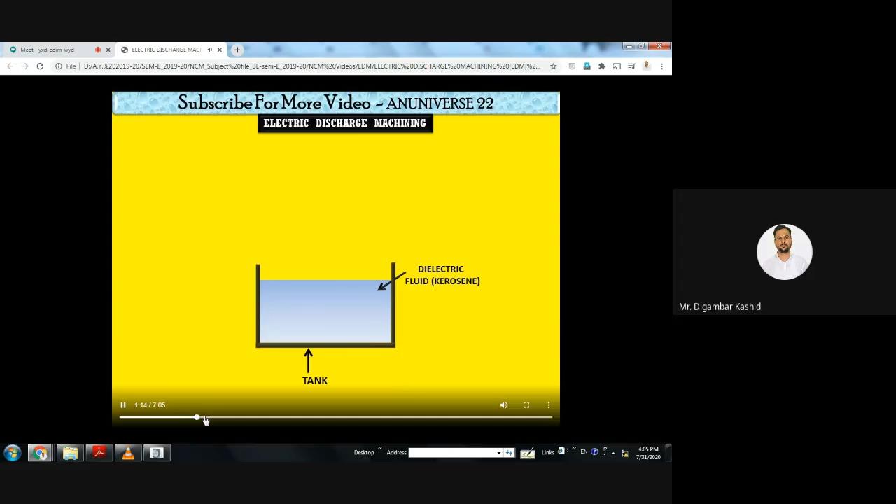Then, as we know, we have to immerse or submerge our workpiece in that dielectric fluid. So you can see there our workpiece is there, which will act as the anode, that is the positive terminal of the DC supply. It is connected to the workpiece.

Then, to pass or circulate that dielectric fluid, we should have the pump, then the filter system, and to flush that dielectric fluid we should have the nozzle. Then the main component is our tool.

And that tool is an electrode because it is connected to the negative terminal of the power supply, so it will act as the cathode. The material of the electrode here used is graphite or copper.

Then we have to give the feed. So for that purpose they have shown one arrow about the feeding.

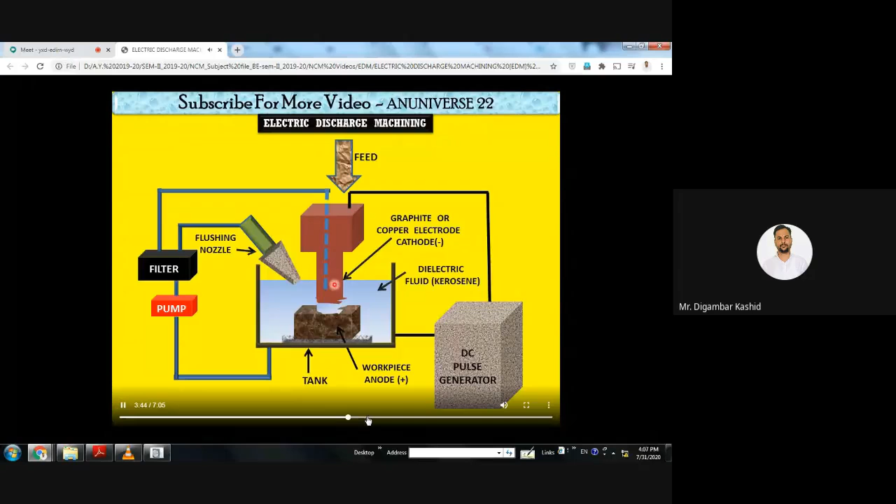Now we can see how we can flush the dielectric fluid between the inter-electrode gap. They are showing it like that. And there are different modes or methods of flushing the dielectric fluid that we have also studied - central, then side flushing also. So these are all the elements, and this is the total setup of our electric discharge machining process, which we already know.

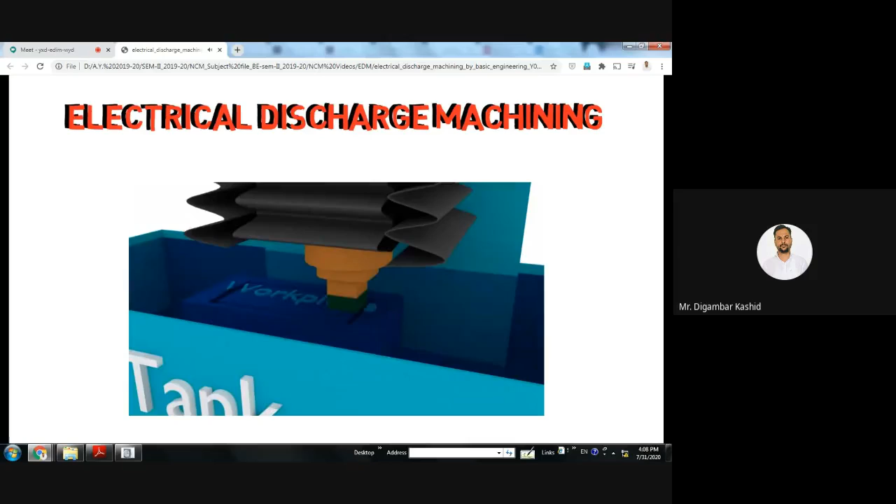Now we have another video about this electric or electro discharge machining. You can see whether the video is visible to you. Yes sir, hello, okay.

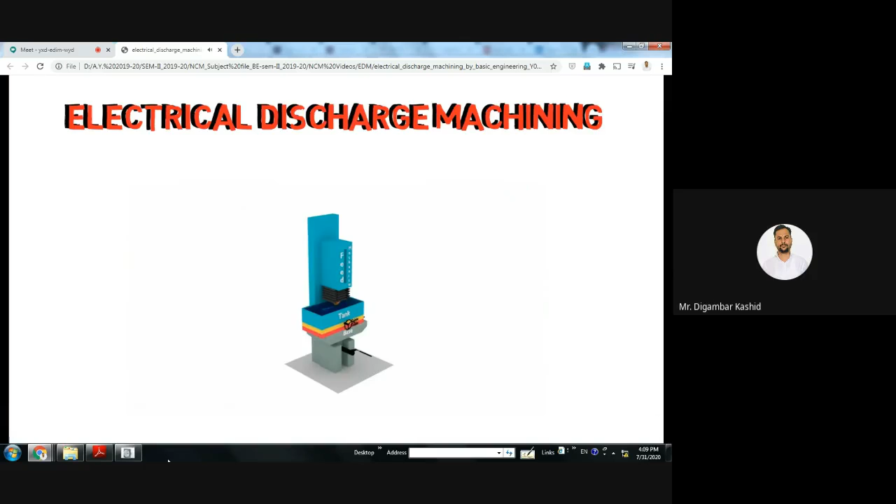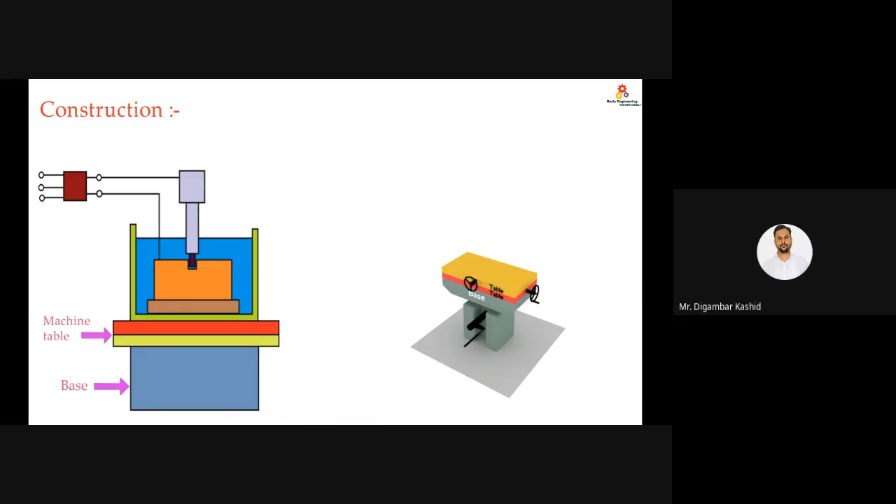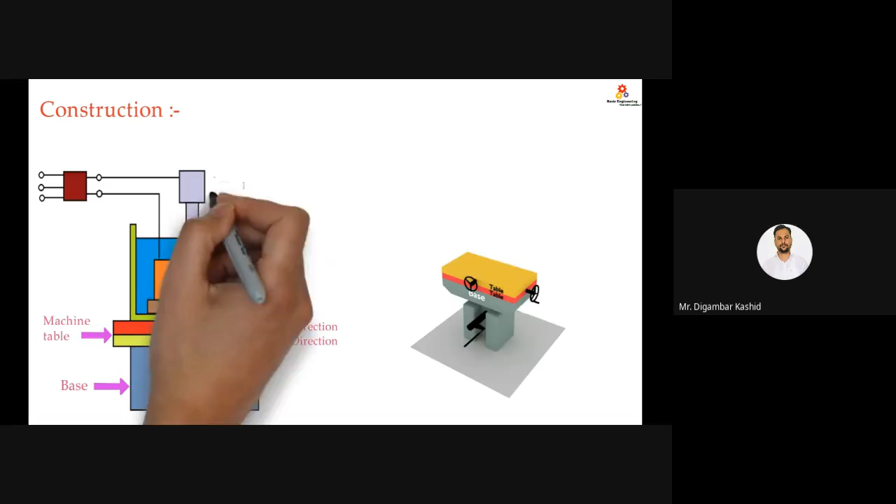You can see how our machine table, the work table, can move in the X and Y directions, and how we can give the feed to the servo mechanism system - that feed we have to give to our tool.

One side I'm showing the schematic diagram of this EDM setup, and on the other side we can see the animated setup with 3D components or elements.

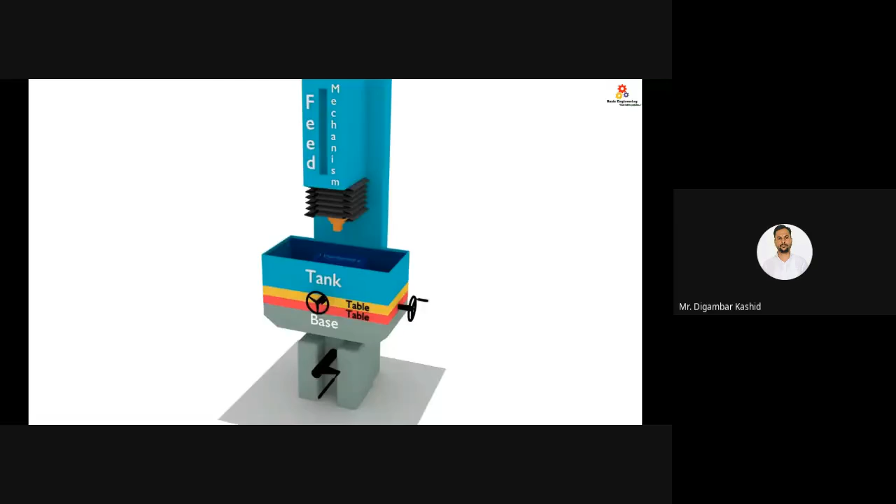So this type of setup, with minimum components, we can go for at our department also. Okay, you can just note down which are the minimum requirements of the machine, and from those parts you can develop our own EDM machine. And again you can go beyond that.

The idea is that the EDM machine should have the capacity of accuracy up to the micron, so you can say a micro EDM machine you can manufacture or develop. Because at our department or institute, till date nobody has developed such a machine. If you see at COEP Pune, then WCE Sangli, they have this type of setup. But for our college we can go for this, we should have that.

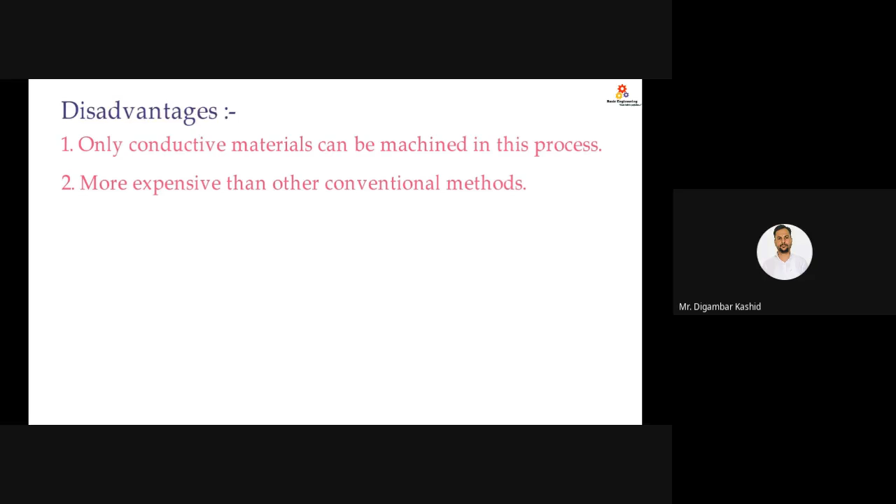Now we'll go for another one.

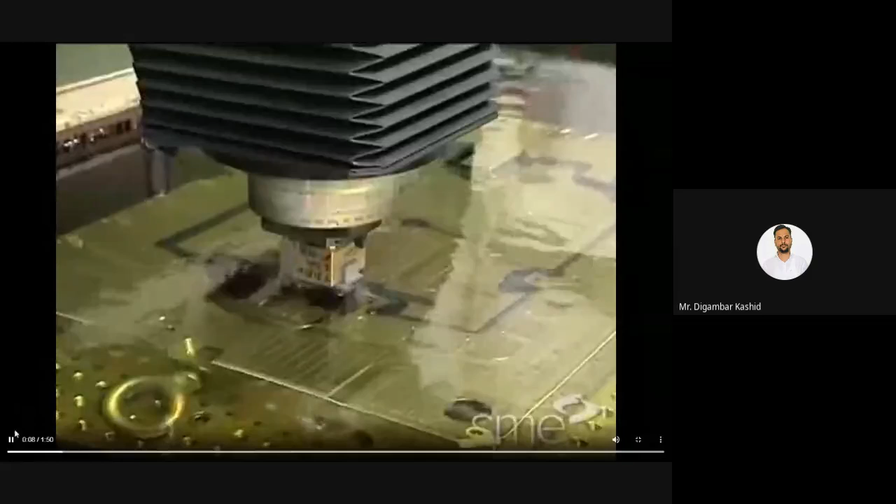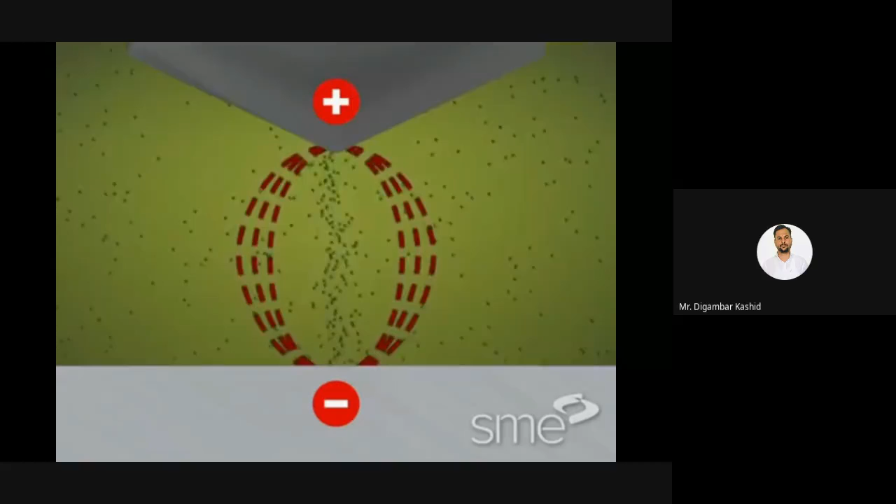This is an industrial application. Now you can see the workpiece, it is already submerged in the dielectric fluid, and this is the tool, having shape as a replica of the desired shape we want on our workpiece. You can see how the spark is generated, how electron and ion particles or molecules transfer between that inter-electrode gap. It's an enlarged view they have shown here. Plus means what? That is the anode. And minus means what? Our cathode.

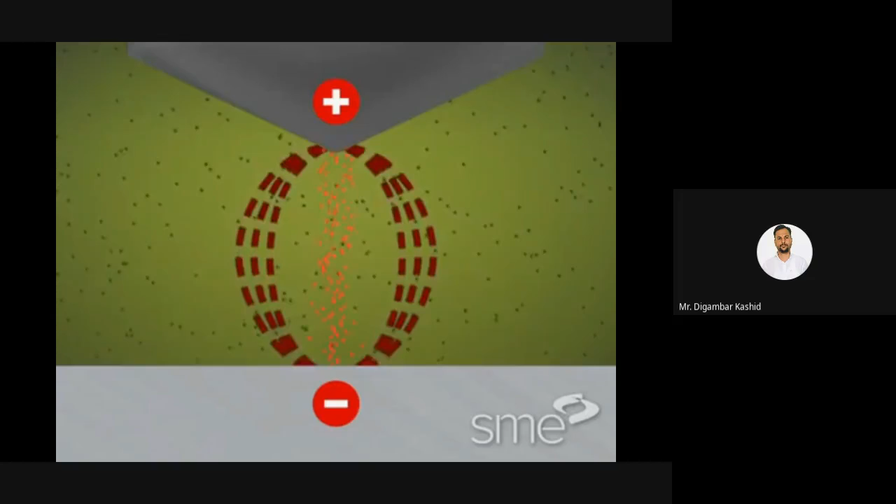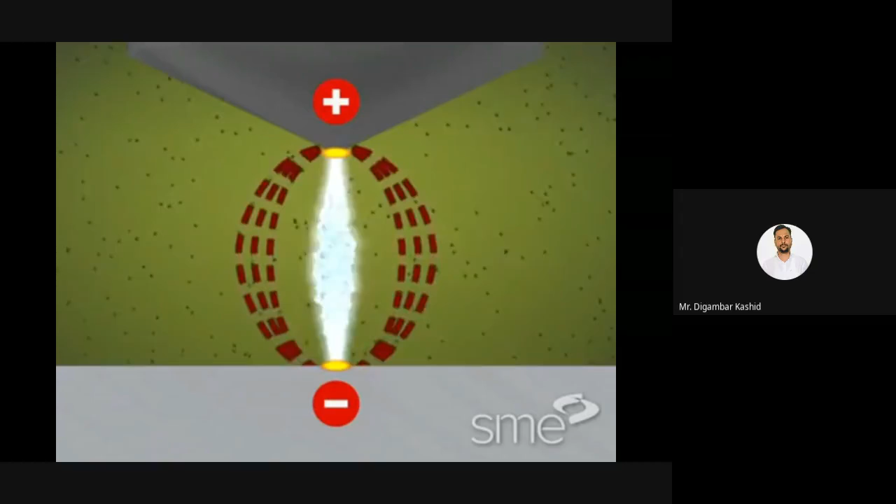If you change that polarity - we know normal polarity is positive terminal to the workpiece and negative terminal to the tool. Now you can see here also how the spark generates in between the interelectrode gap, between tool and workpiece, and that column is called the ionized column. And after melting, evaporation happens.

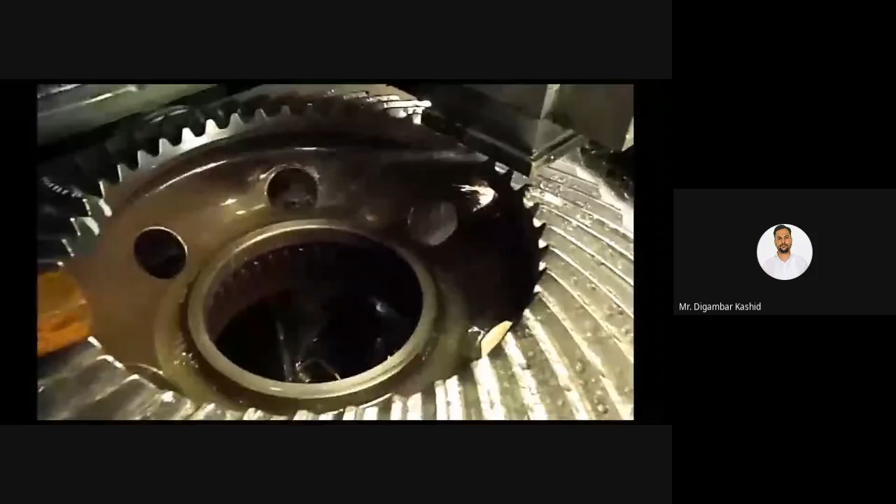Now you can see how the manufacturing of a gear is carried out using electro discharge machining. This is the EDM process; using this EDM process they are manufacturing a gear. That flushing, that liquid you are seeing, that is the dielectric fluid. Now you can see sparks generating there, and that is the gap we are observing - that is the interelectrode gap, and in that gap the spark is generating.

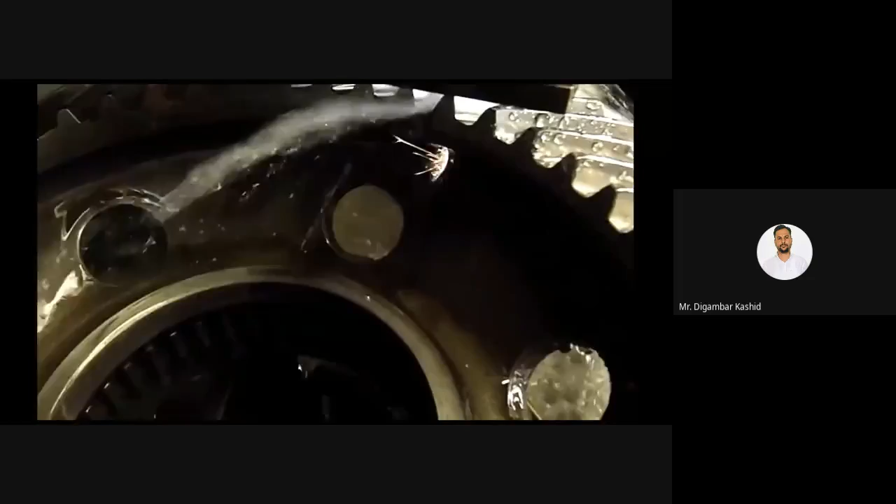Whether video is visible, Saurabh Dotre? Yes sir, yes sir. Okay, Amol Mari, whether are you watching this video? Amol - yes sir. Mari - yes sir. Okay.

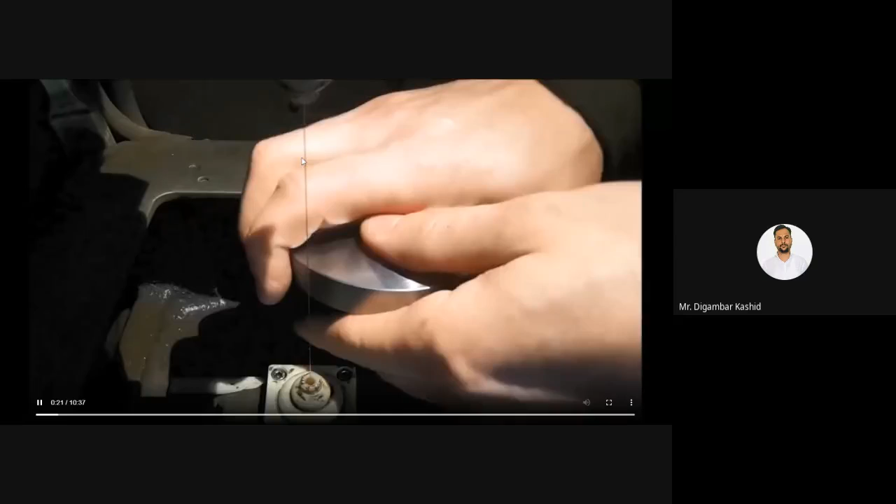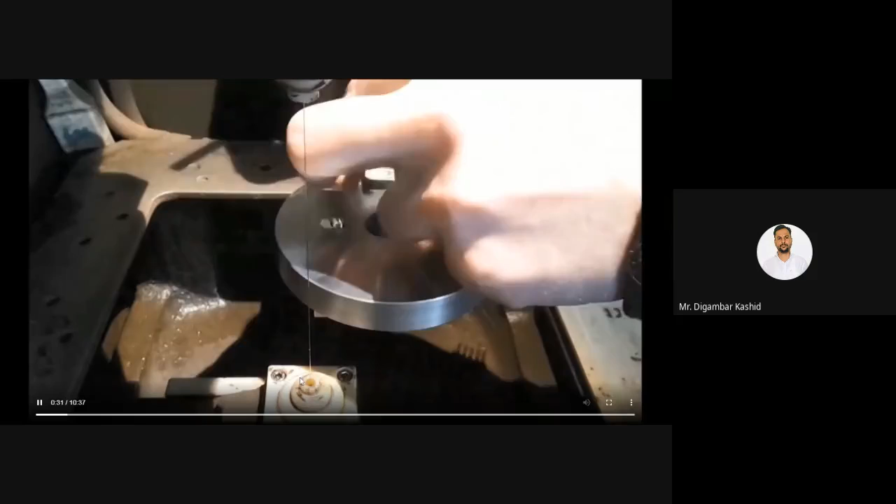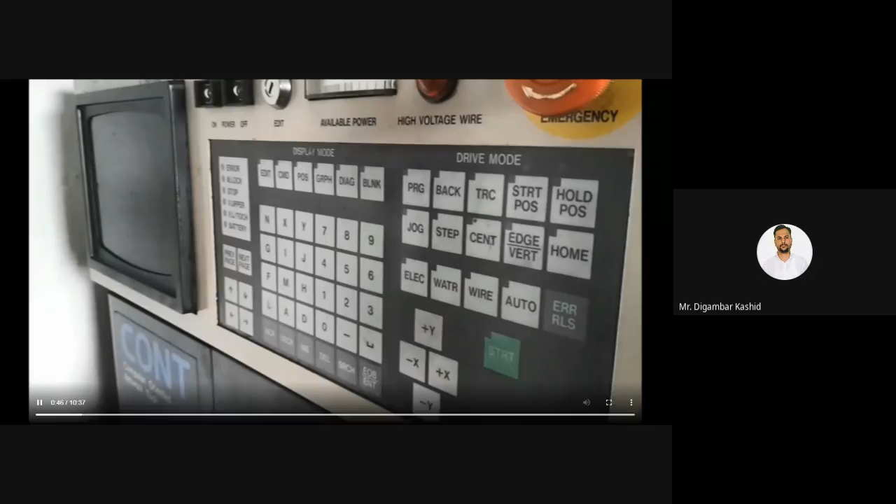Another one - gear cutting, but using the wire cut EDM process. You can see this is our wire - this is my cursor - and this is the workpiece. That person has mounted the workpiece. These are the wire guides. Now he is mounting the workpiece properly, and then after mounting he will go for the positioning, which will be carried out using the computerized numerical control positioning system. You can see they have shown that.

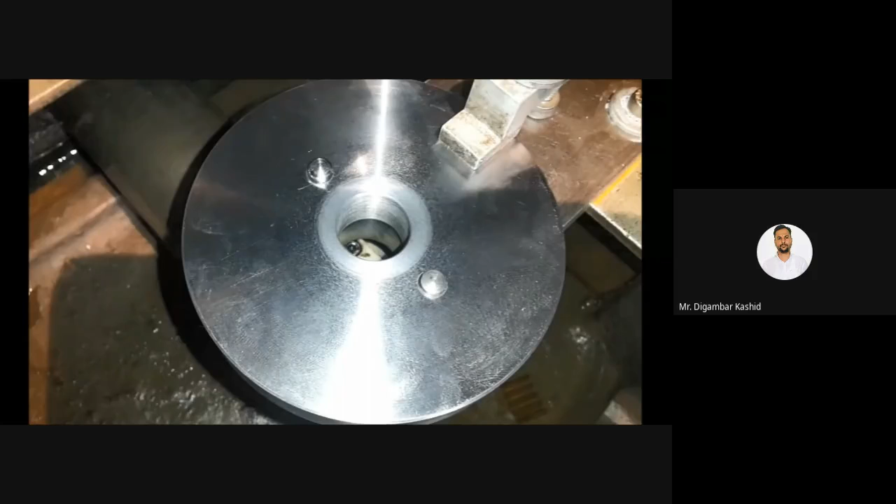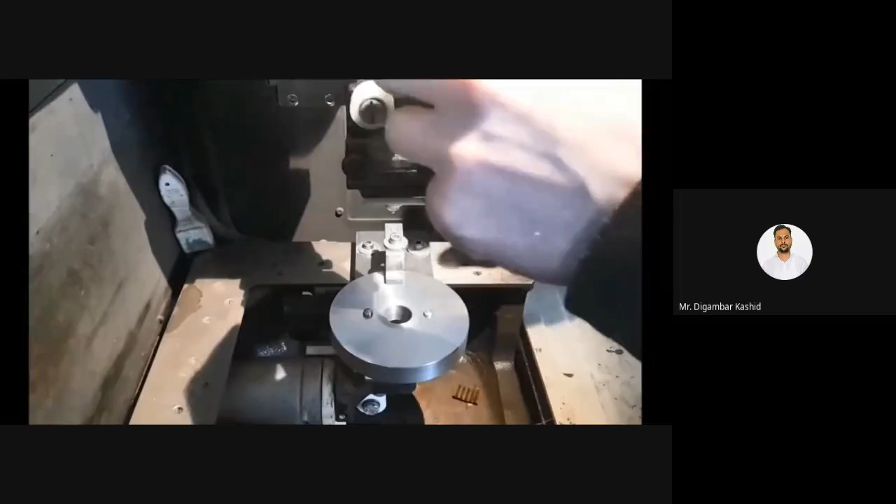That positioning is going on. Now here you can see the wire. From the supply reel you take the wire, then it will go to the next reel at the output end.

Reuse of this wire is not permitted for this process - we already discussed this in the last lecture. Very small diameter for this wire, maybe around 0.15 to 0.30 mm, and normally brass wire is used. These are called take-up reels - you can see the reels here.

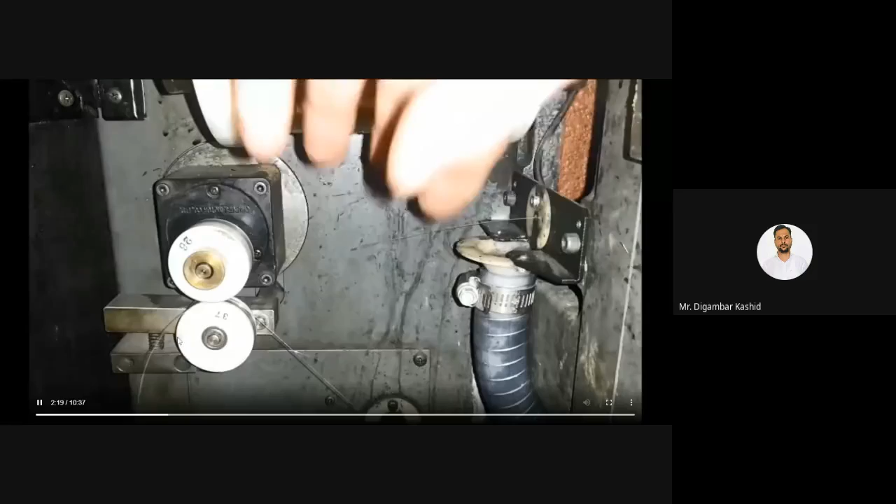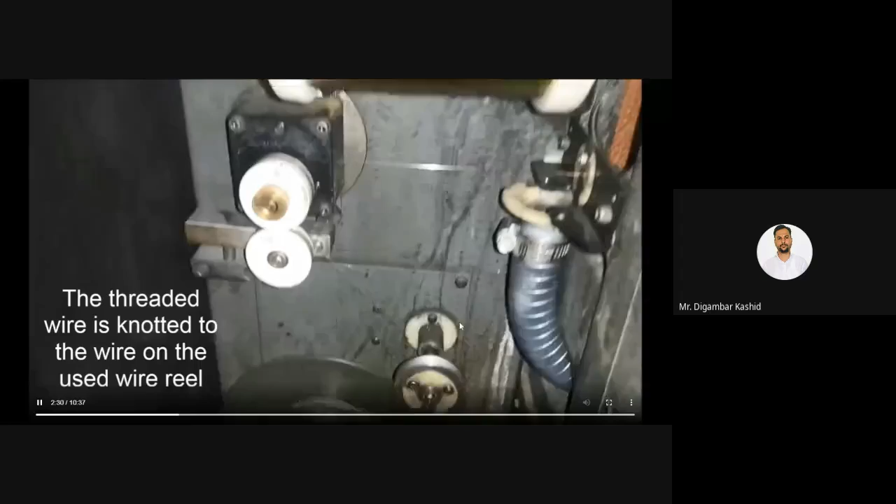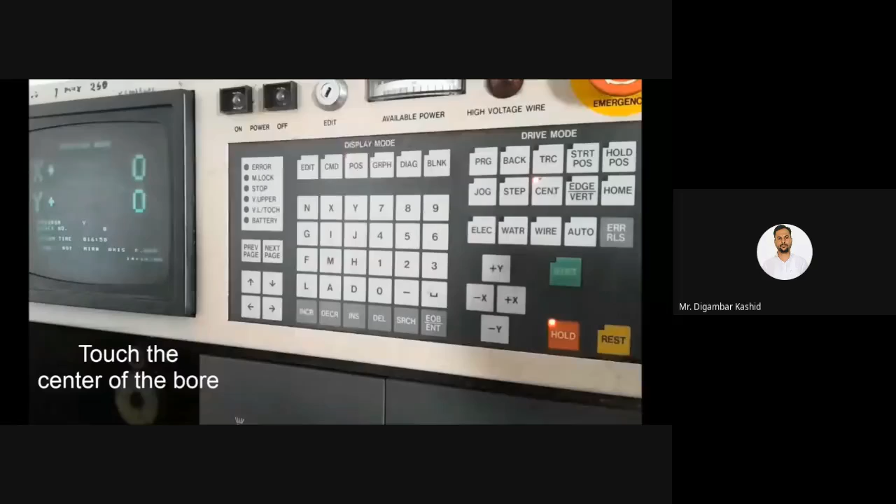Now these are the guides, you can see here. So this is called bowing of the wire - I was explaining this point last time. We have to give inclination to the wire like our 'Dhanushyaban' (bow and arrow), as we know in Marathi.

Now after positioning, they will start the operation. Now whichever shape they want for the cutting of the gear - for this particular video, gear cutting operation is there - whatever desired shape they want, the command has already been given by the numerical control system, and accordingly we will get that shape.

Now you can see, firstly we have to submerge the tool as well as the wire and the workpiece with the dielectric fluid, that is deionized water, and you can see. Once you start the pulse on, that means the supply of electric energy, then spark will generate in between the interelectrode gap - the gap between the wire and the workpiece surface.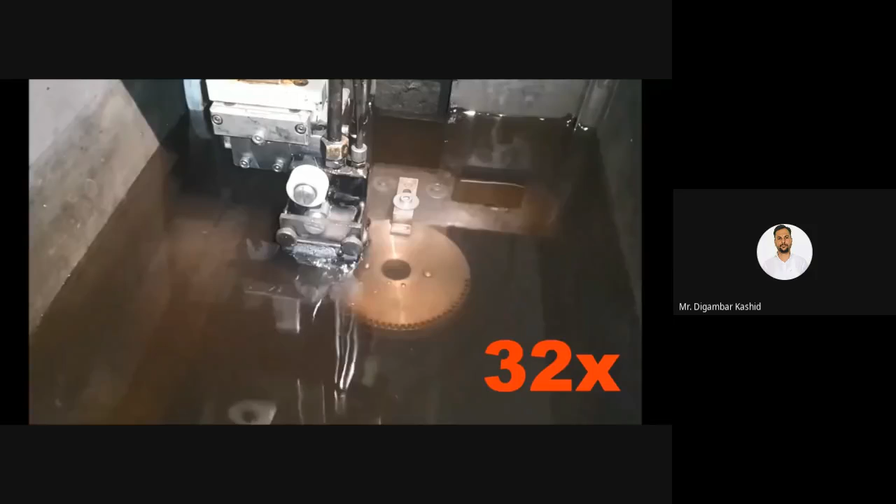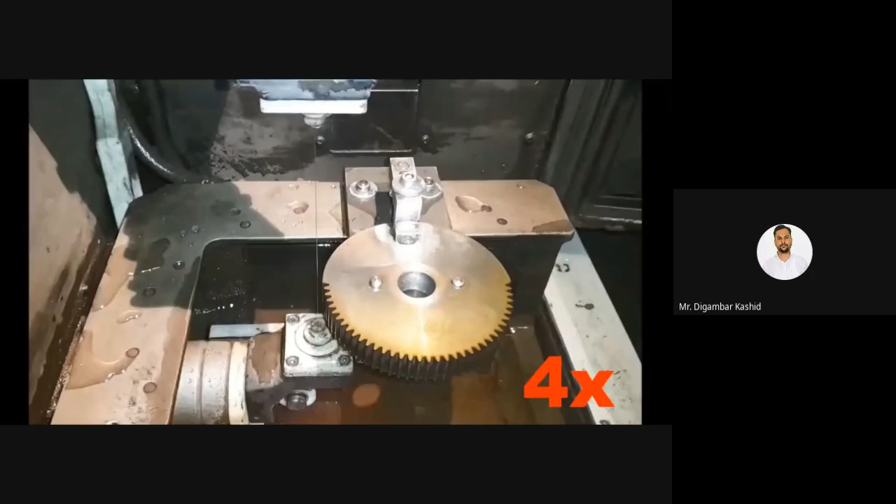Now you can see there the spark is happening, and due to that spark metal removal will start, with the help of the melting action as well as partial vaporization. So you can see now here, now we got the gear - the external gear.

You can see how the shape is machined, or you can say manufactured, using this wire cutting process. For the remaining part, again positioning and all these things, adjusting, and then they will start.

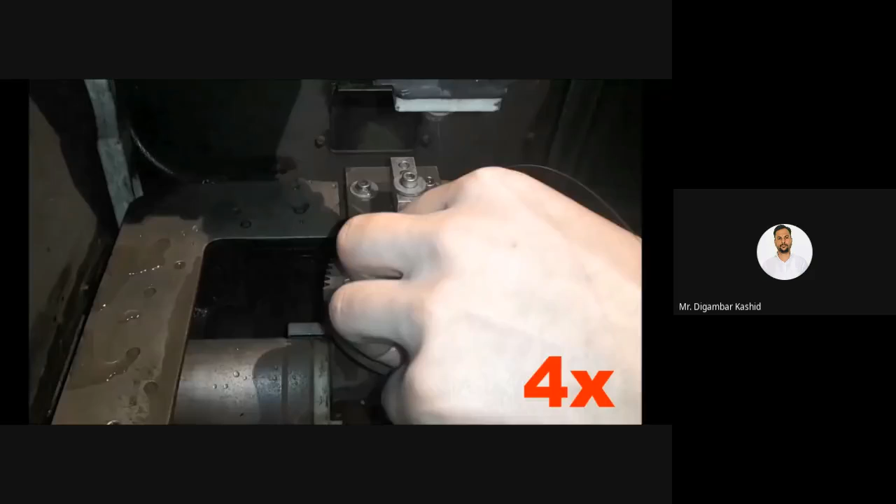So these are the advanced machining processes. Our title of the subject is the same - advanced machining process, or you can say non-conventional or non-traditional machining processes.

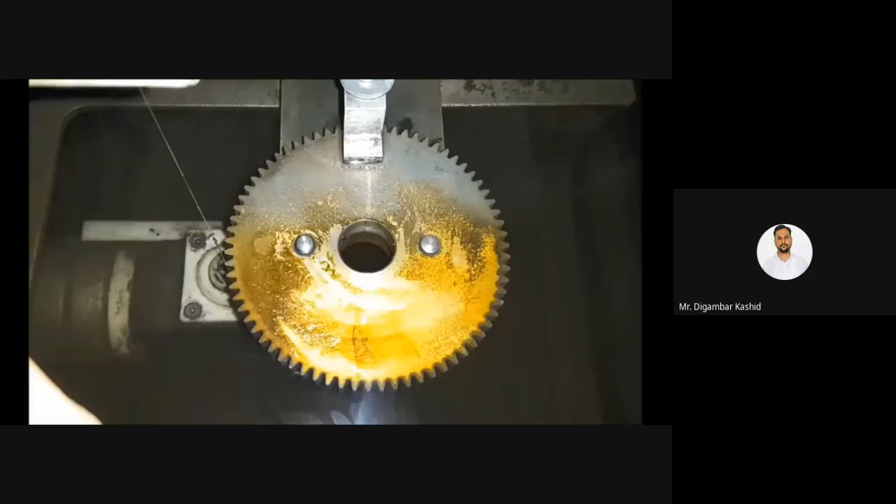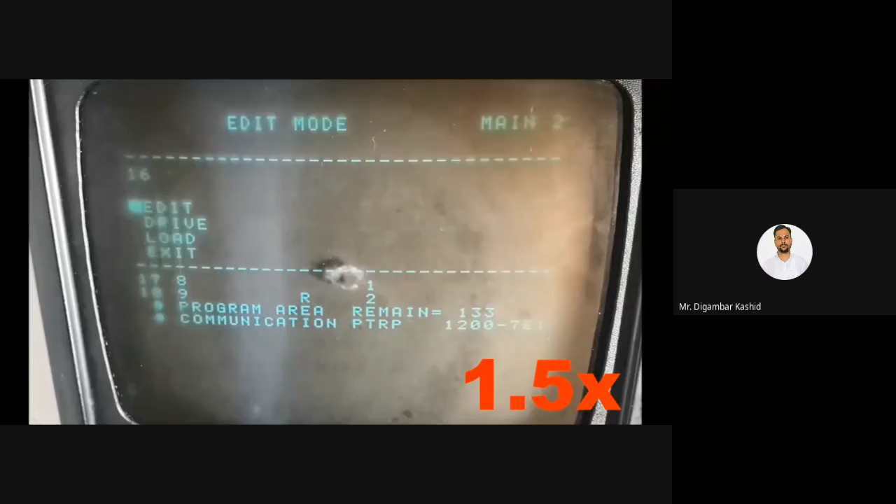Whether these videos are understandable? Okay, I think you understood whether these videos are understandable. Okay, Abhinay, I will go for the next one.

Now we'll see the animation video of the wire cut EDM.

Now, very soon you will get this type of animation video from my side also. I also started to prepare these types of animation videos. You will get them very soon.

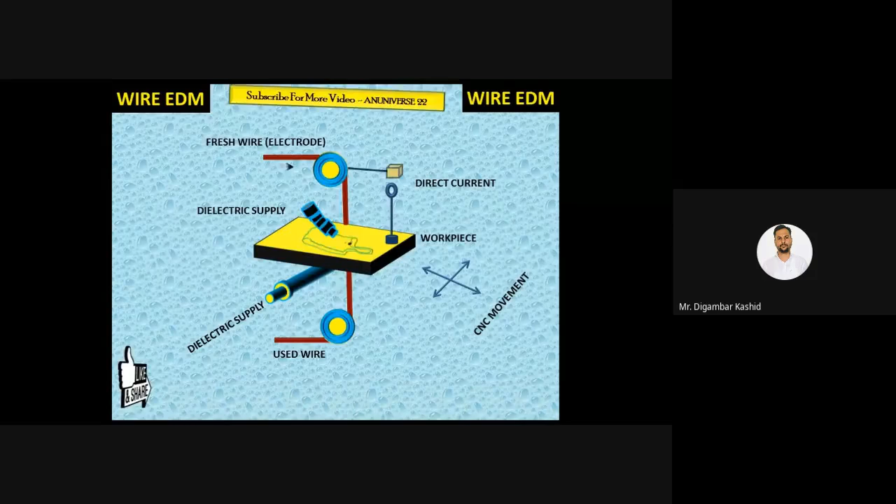Please try to convert the theoretical knowledge into practical things, for research or for your project, because our subject will give many opportunities or ideas for your research or project.

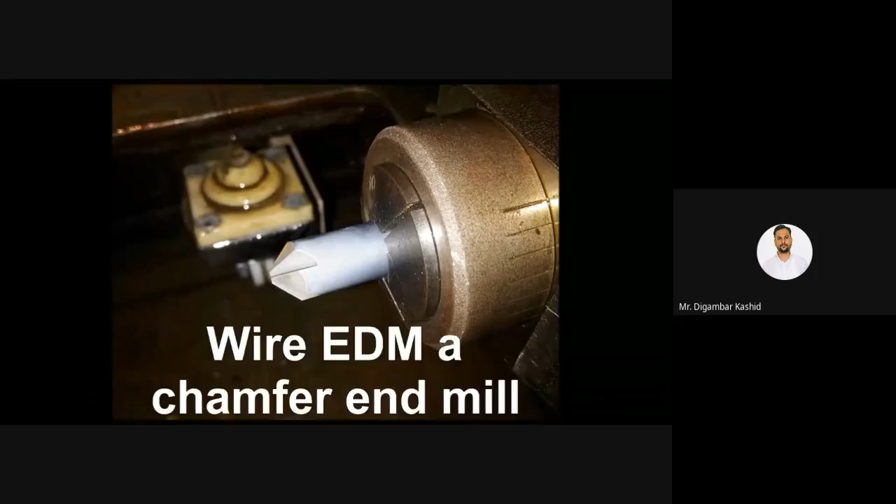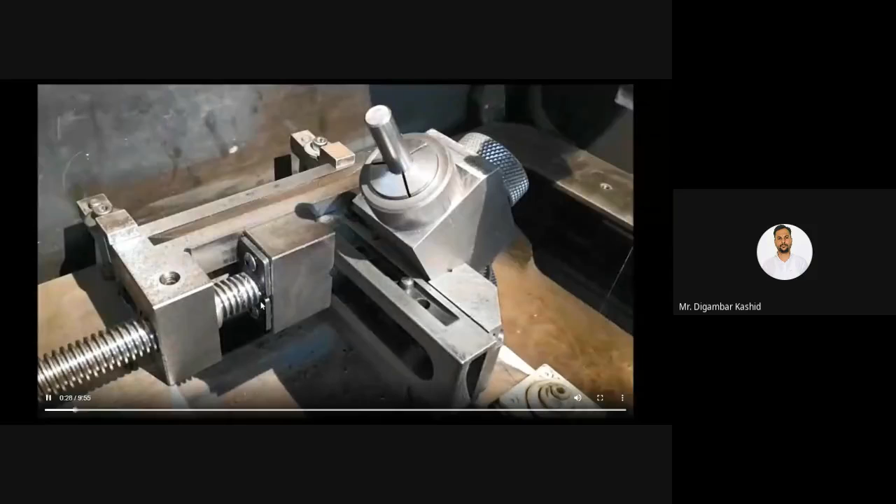Another video regarding the wire cutting process for the chamfering purpose. Okay, this is your workpiece. Correct. You can see now here.

Using the wire cut EDM process, chamfering is happening. This is your workpiece, and this you can see is the wire acting as a tool for the chamfering purpose. They are using this wire cut EDM process.

See, dielectric fluid. And now you can see, yeah, sparks are occurring there in that gap. Okay, and due to that melting and vaporization, you are observing that some bubbles are creating in that fluid.

Now you can see how that material is removed. Okay, there chamfered. You can see.

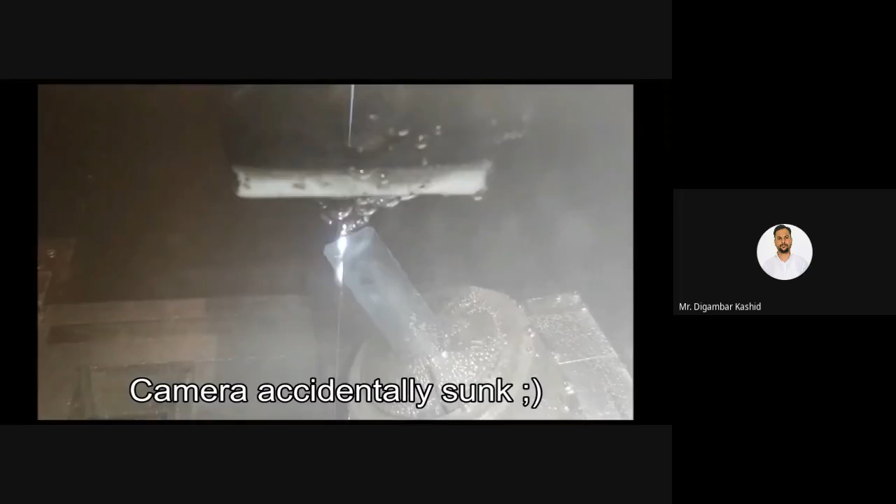You can see how the spark is generated. There is no physical contact between your electrode, that means your wire, and your workpiece. Okay, there is always a small gap that is called the inter-electrode gap.

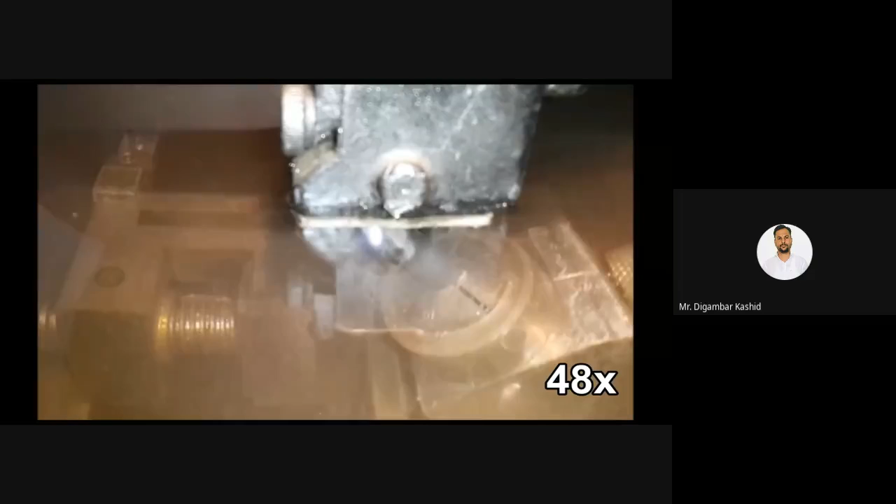Now you can see the machined workpiece. Okay, you can see this type of shape is generated, that we got on our workpiece. Okay, you can see.

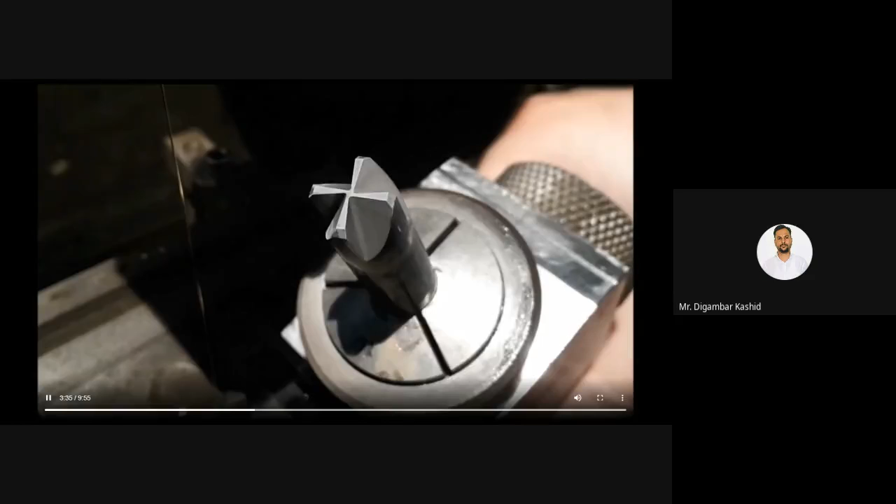Again, adjusting of the workpiece. Okay.

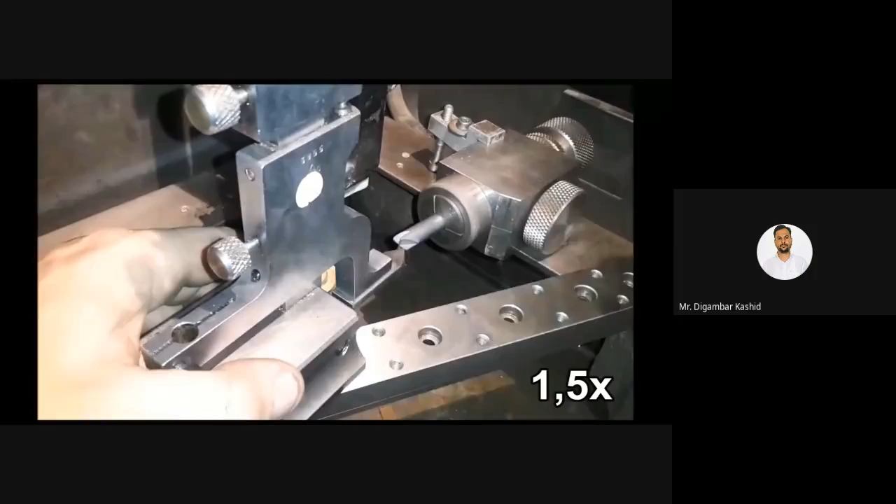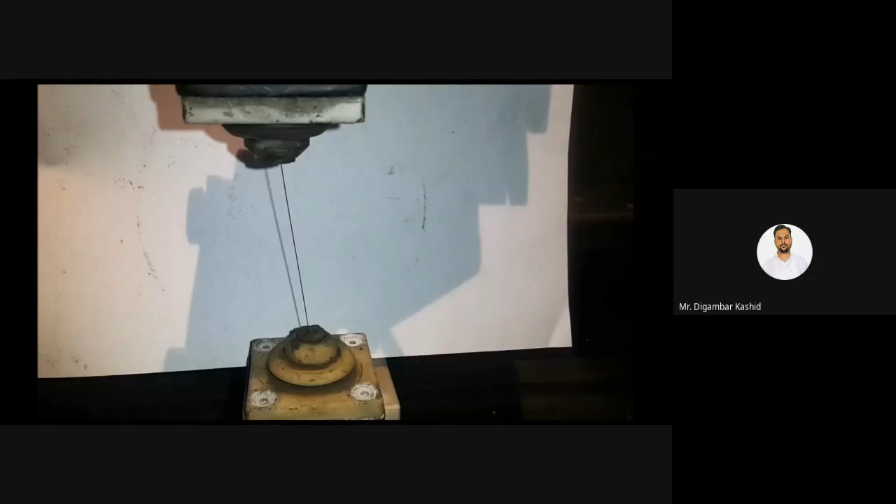The positive terminal of the power supply is connected to your workpiece. Okay, once again I repeat, and the negative terminal is connected to your wire. Okay, so due to that, your wire will act as a cathode and your workpiece will act as an anode.

What are you looking at on this upper part? Okay, where you are getting the wire, it is called the take-up reel or guides, wire guides. Okay.

Now once adjustment or positioning of the wire happens, then supply of the dielectric fluid will start, and then the circuit will start. Okay, whether it is interesting.

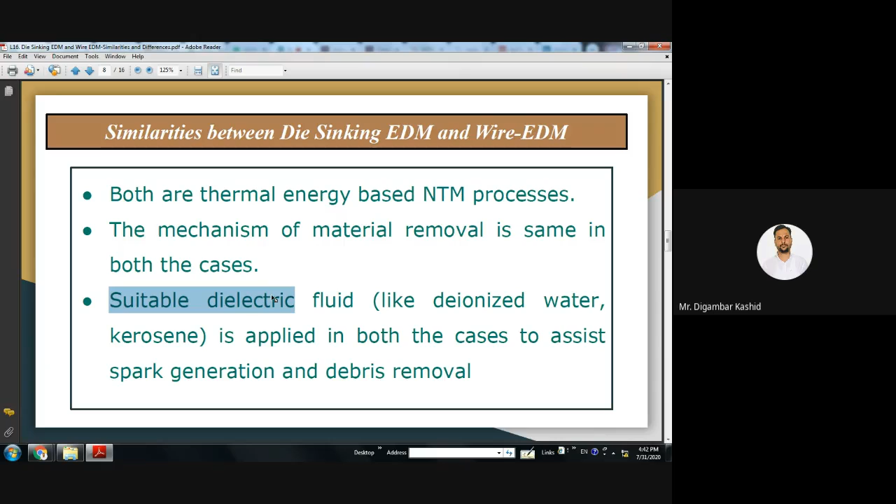What suitable dielectric fluid is required? Kerosene or deionized water, and for both the cases it is the same. This dielectric fluid is applied in both cases for what purpose? To assist the spark generation and debris removal purpose. So these are the similarities.

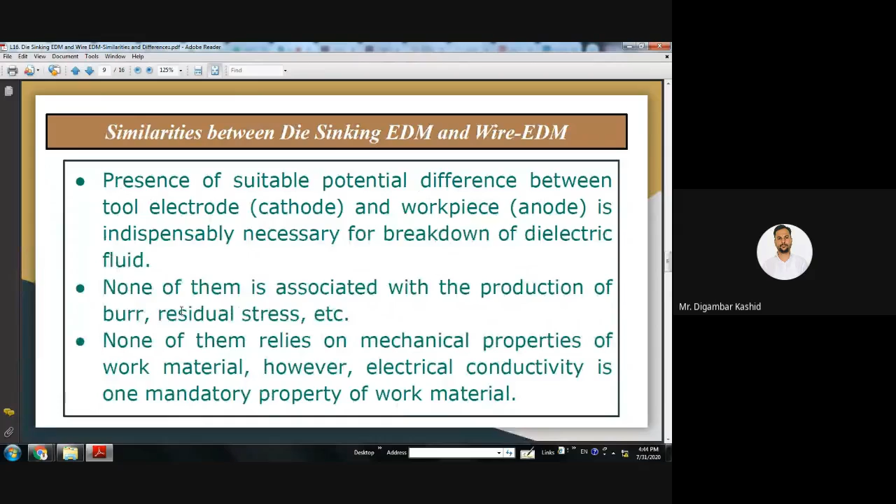Now we'll see the differences between die sinking EDM and wire EDM. In our syllabus we don't have a separate point for the difference, but after studying die sinking and wire cut EDM, you should be able to differentiate both processes. For that purpose I am taking this point.

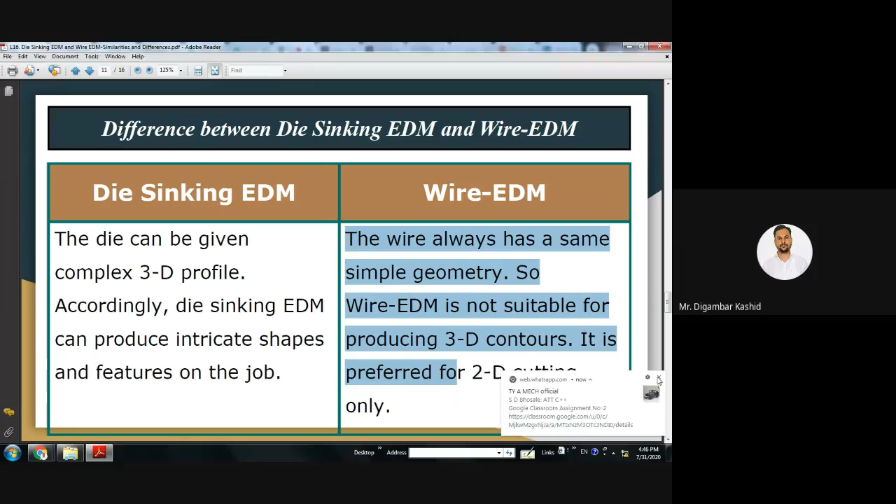In case of die sinking EDM, the die can be given a complex 3D profile. Accordingly, die sinking EDM can produce intricate shapes and features on the job. But in case of wire EDM, the wire always has some simple geometry, so wire EDM is not suitable for producing 3D contours or 3D shapes. It is preferred only for 2D cutting.

Die sinking EDM can produce blind features like holes or cavities that are not open at the bottom end. Wherever we have to go for machining of complex geometries, complex shapes, or cavities, for that purpose we can go for die sinking EDM. But in case of wire EDM, it cannot produce any blind features. It is applicable only for profile cutting, just like gear cutting, by means of through holes only.

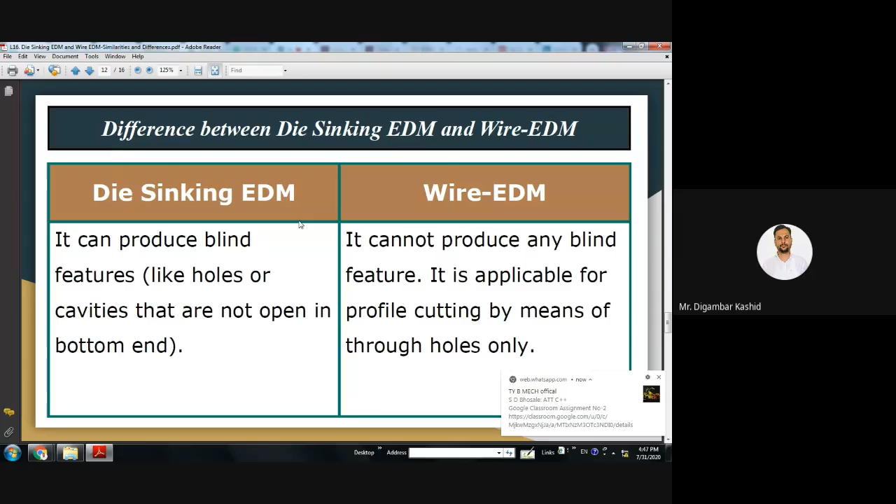That means if you want to go for slot purposes, then you can go for wire cut EDM. Then the next point is that die sinking EDM can start machining at any location on the workpiece, irrespective of the presence or absence of an edge or through holes.

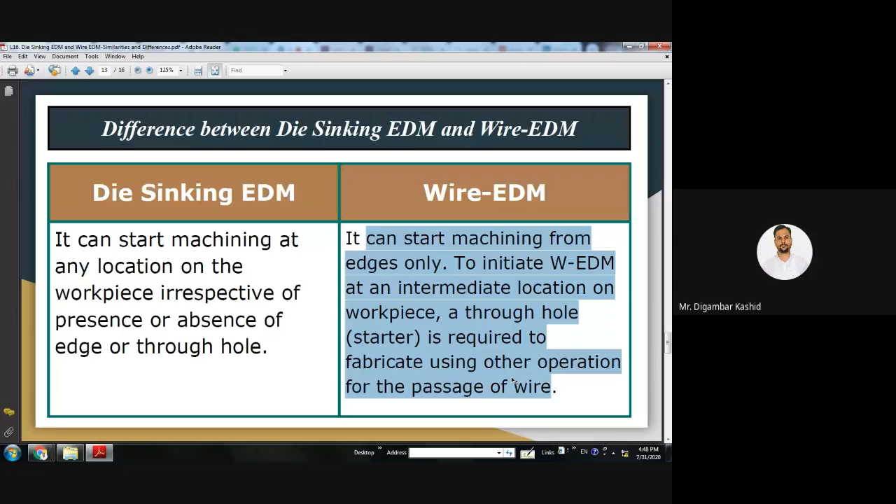But our wire cut EDM process can start machining from edges only. To initiate wire cut EDM process at an intermediate location on the workpiece, a through hole or starter is required. This is fabricated using another operation, to allow passage of the wire. Firstly we should have some slot or through hole, then only we can start intermediate machining using wire cut EDM.

Die sinking EDM is commonly used for 3D contouring, finishing purpose, drilling and deburring purpose - these are its applications. But wire cutting EDM process is mostly used for high accuracy profile cutting, sample preparation, and separating or parting or slotting purpose.

So these are the points - that means the differences between die sinking EDM and wire cut EDM process. Whatever I have told just now, what are the points I have covered?

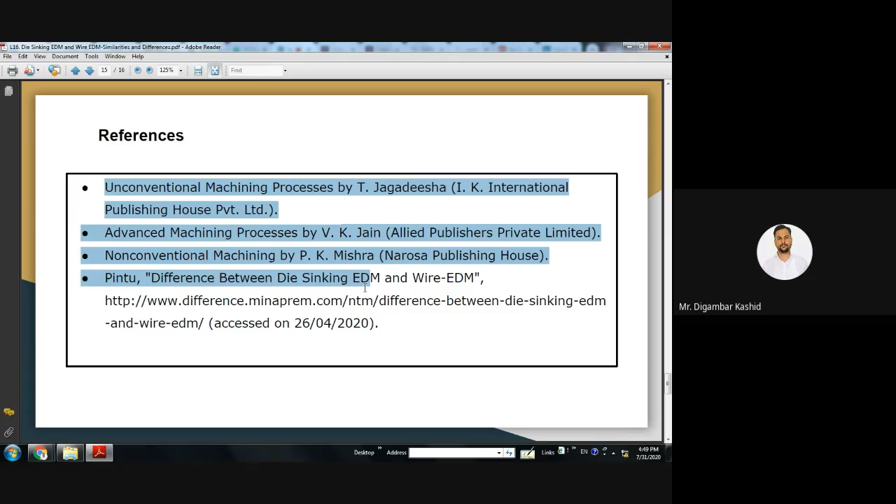So all these points are taken from different books, and those references I have shown here - VK Jain sir's book, that is Advanced Machining Processes, then Non-Conventional Machining by PK Mishra, Unconventional Machining Process by T Jagadeesha. All these books are available in hard copy in our institute library or central library. You can take these books afterwards, no problem.